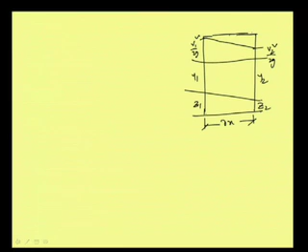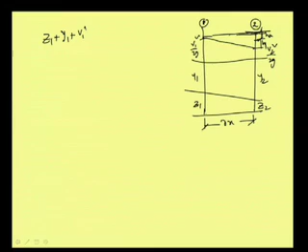And then there is energy loss that we could get some expression for. This energy loss we can divide into 2 parts, hf, loss due to friction, and loss due to acceleration. Then equating the energy between section 1 and 2, just recall we did that in our last class, we could write that z1 plus y1 plus v1 square by 2g is equal to z2 plus y2 plus v2 square by 2g plus hL. This hL is nothing but hf plus ha, friction loss plus energy loss due to producing that acceleration. This part also we derived in our previous class.

Then putting those expressions, if we recall, hf we got from the friction slope. If friction slope is Sf, then Sf into delta x is the total friction loss, hf. And the loss due to acceleration we could derive as 1 by g, del v del t into delta x. This acceleration loss is per unit weight; you can see this energy we are writing in terms of per unit weight. That is why we calculated this acceleration also in terms of per unit weight.

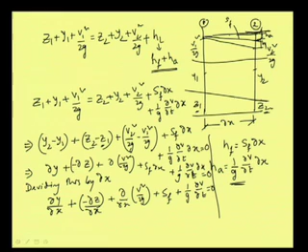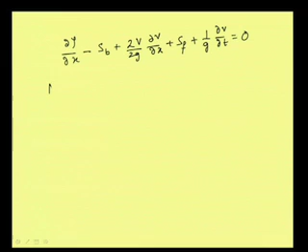Now, this we can differentiate. How? Twice v, then del v del x. So, let us do that. Twice v by twice g, and so it will be v del v del x plus Sf plus 1 by g del v del t, this is equal to 0. Okay.

Now, if we multiply this expression by g, what will we get? Say g del y del x plus Sf minus Sb, I am writing Sf first, then the 2 and 2 go out here. So, it will be v del v del x, then plus del v del t is equal to 0.

This is the equation; with Sf and Sb we did not have the term g, so as we are multiplying by g, this will be multiplied by g, and this is the equation of motion. Now we are treating this as a derivative, although we were writing a small increment earlier, following the basic concept that v will be changing partially with respect to time. That is why we were putting the notation del there to represent a small distance.

So then we can write this as del v del t plus v del v del x plus g del y del x plus Sf minus Sb equal to 0, and this is the required equation of motion. This is a simple way of deriving this equation. Of course, as I explained in the last class, we can derive this expression starting from momentum, from Newton's equation of motion, and that way also we can get the equation.

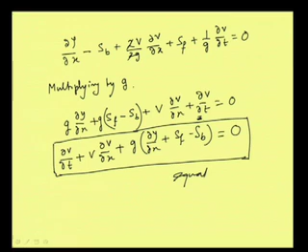Say this is our equation of motion. Now in this equation, if we consider the bed slope to be very small and negligible, then SB will become 0, so this term goes out of our equation. Then if we consider SF, the friction loss, to be negligible, suppose it is a short reach or somehow we are neglecting the friction, that will go out, and the equation will take a different shape.

As we have explained already, solution of these equations is not that simple because of their form, and if we consider the fully dynamic equation, the solution becomes complex and we need to take recourse to numerical methods. Let us see how we can solve the governing equations. The governing equations of unsteady, gradually varied shallow water waves are of nonlinear hyperbolic type.

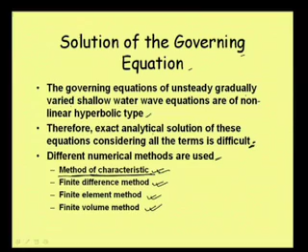Now, as far as this particular course is concerned, we will be discussing just some aspects of the method of characteristics, not all, because these we are keeping for a higher level of study. So the method of characteristics also will not be discussed in detail.

Monge in Paris developed a graphical procedure in 1789 for integration of partial differential equations. In fact, the method of characteristics was initially given as a graphical procedure for integration of partial differential equations, and he named this procedure the method of characteristics. So it came long back in mathematics. Then Massau, and Craya and Isaacson, applied this method for analyzing flood waves in open channels.

Now you may wonder how it still remains popular. It was started long back in 1789, people used it in 1889, so why is it still being used? Because starting from the method of characteristics, Ritter did a solution in 1892, long back, for dam break flood wave simulation.

Then we started this problem, and we could see that for dike failure, to simulate the dike failure flood, suppose the flood is moving from the river due to failure of a river dike, in that case we do not have a solution, or we require a solution to fit into the initial part. Later on we can take it numerically, but the initial solution is important in some aspect.

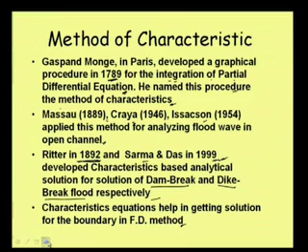And this method of characteristics helps us in getting the solution for the boundary. That's why we need to study this method and the very basic concept of the characteristic method, so that if we go to a higher level and apply other methods, we will be able to use the advantage of this knowledge of the characteristic method.

Well, then the method of characteristics, what it is, its basic way of doing is that this is a technique of converting a problem of solution of two nonlinear hyperbolic partial differential equations into a problem of solution of four ordinary differential equations. As far as our water problem is concerned, we have two nonlinear partial differential equations: one is the continuity equation, another is the momentum equation or energy equation.

These two partial differential equations, nonlinear hyperbolic type, cannot have a direct solution by direct integration. So if we can convert these two equations into ordinary differential equations, then our task is simplified. That is done by the characteristic method, and then we can plot those graphically, and this gives us the solution at certain points. We will be coming to those points.

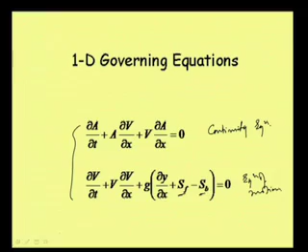So let us take this equation, and we are writing this for a prismatic rectangular channel. If we write it for a prismatic rectangular channel, then this will be further simplified. So we will be starting with this expression: del A del t plus V del A del x plus A del V del x is equal to 0.

So this is the continuity equation first, and we can write del (B into Y) del t plus V del (B into Y) del x plus, this area again we can write B into Y, then del V del x, that is equal to 0. Now this part we are writing for rectangular, and then for a prismatic channel, what is that?

For a prismatic channel, B is not varying with x, meaning our width is not varying with distance, because the very basic definition of a prismatic channel is that the sectional dimension does not change in the channel reach considered. So this B is not varying, and as such we can bring B common, or rather we can cancel B.

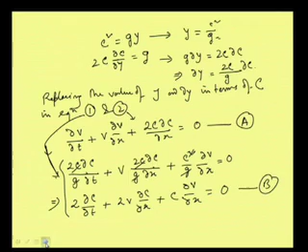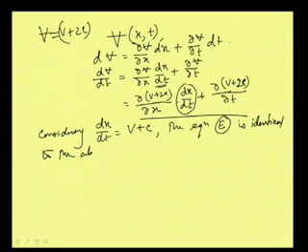Considering dx/dt equal to v plus c, that means if we put dx/dt equal to v plus c, then the equation, let me give a name to this equation, say E. The equation E is identical to the above equation. So what we are getting basically is the total derivative of v plus twice c with respect to time t. So it is identical.

So if it is so, our expression is actually equal to 0. This expression is equal to 0, so this is also equal to 0. That means d(v plus twice c)/dt is equal to 0, but this will be valid when dx/dt is equal to v plus c.

So the total derivative of v plus twice c is equal to 0, which implies v plus twice c is constant. Along with that we have to have the equation dx/dt equal to v plus c. So these are the combined equations. Only on those points where dx/dt is equal to v plus c do we get that v plus twice c is equal to constant.

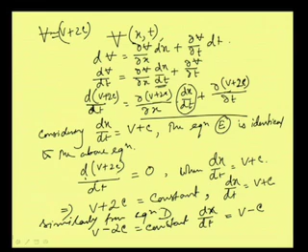Similarly, if we take the other equation, equation d, obtained by subtracting, we can get v minus twice c is equal to constant when dx/dt is equal to v minus c. So these are basically ordinary differential equations. We started with a partial differential equation, but we are getting ordinary differential equations, four equations in this form. This gives us a better opportunity for solution of the problem.

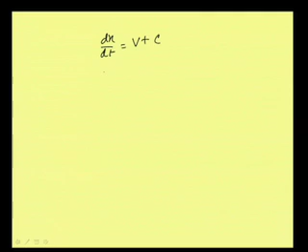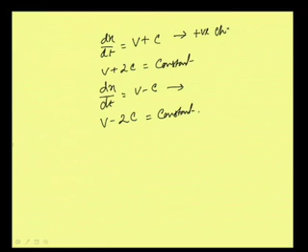Now, these can be written as dx/dt equal to v plus c, along with v plus twice c equal to constant, and dx/dt equal to v minus c, with v minus twice c equal to constant. These are called characteristic equations. Since this one is v plus c, it is called the positive characteristic equation, and this one is called the negative characteristic equation.

And v plus twice c equal to constant is called the positive Riemann invariant, and this is called the negative Riemann invariant, because it is not varying, it is remaining constant.

Now let us understand this point: we can consider v plus twice c as constant only on those points which follow dx/dt equal to v plus c. If we make a computational domain of x and t, we can have a line whose slope is given by v plus c.

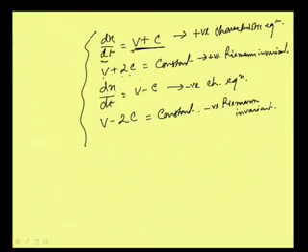So v plus c gives us the slope, and accordingly we can draw a line. At any point on that line, if we take v plus twice c at one point, and v1 plus twice c1 at another point, the value will remain constant. Taking that advantage, the characteristic equations can be used for solution of the governing equation.

Now let us see how we represent this graphically. Graphical representation means we take the x-t plane, so this is our x and this is the time t.

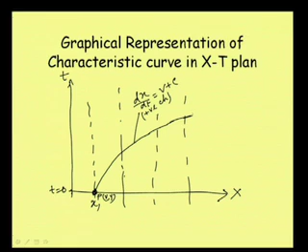Now initially, at the steady flow condition, suppose we know the value of the variable at some value x1. What are our unknown values? Our unknowns are the depth and velocity. So at this point, let this point be p, suppose we know v and y, and we know that v plus c is equal to dx/dt. So accordingly we are drawing this line.

Then say at another time level, t1, we do not know, because unsteadiness has started and we want to get the solution at time t1. At this time level we have this point, let me write it as r because I will be drawing another curve on that side. At this point the velocity and depth are unknown at time level t1.

But we know one relation, if I put this as v_r and y_r. Along this line we know that v plus twice c is equal to constant. So v_p plus twice c_p, where c is nothing but root over g y_p, is equal to v_r plus twice c_r. Let me write it as c_p and c_r so that you may not confuse.

But what is c_p? So v_p plus twice root over g y_p is equal to v_r plus twice root over g y_r; our unknown quantity is actually y. So these equations are there, but we need to solve for two unknown quantities, v_r and y_r, and we have only one equation.

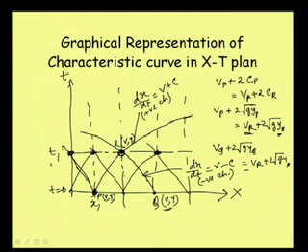That is the beauty of the characteristic method. Once we know this value, similarly we can get the solution here, and proceed to solve here and here. But to solve this one we need some boundary condition or boundary relation. Of course, we will be getting one negative characteristic line giving one relation, but we need one more relation.

Okay. Now, let us see for subcritical flow. For subcritical flow, we know that V is less than C. Then dx/dt equal to V plus C, the positive characteristic line, will have a positive slope. And dx/dt, say, what is the negative characteristic line?

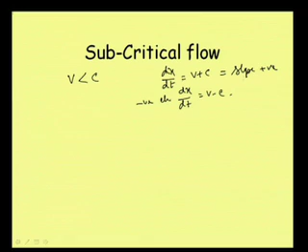Negative characteristic: dx/dt equal to V minus C. As V is less than C, this will have a negative slope, and that is why when I was drawing for subcritical flow, if I draw the x-t plane, this is the time, this is x, then for subcritical flow we get the positive characteristic line this, negative characteristic line this. This is the positive characteristic and this is the negative characteristic, and that is why earlier we were drawing this is positive, this is negative.

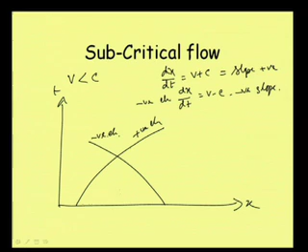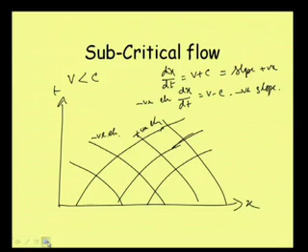Well, this is not the only line; we will have several sets of lines like this and several sets of negative characteristic lines, because at different points we will have different situations, and that will lead us to several lines. Then in the case of supercritical flow, V is greater than C. So the positive characteristic, dx/dt equal to V plus C, will definitely be positive, but the negative characteristic, dx/dt equal to V minus C, will also have positive slope.

So positive means we are talking about positive slope in the x-t plane. We are drawing this in the x-t plane, and because V is greater than C, V minus C will also have positive slope. But which slope will be greater? Because of V plus C, the positive characteristic line slope will be greater, so it will go like this. Greater means we are writing dx/dt, not dt/dx. So t is this, x is this. Slope more means it will be from the t line.

So the positive characteristic goes like this, and the negative characteristic goes like this; it has less slope. From our general concept we may feel this has higher slope, but we are talking about slope with respect to this line. So this has less slope; it is the negative characteristic. That way we get a series of curves like that. And this is the case when the flow velocity and wave are moving in the same direction.

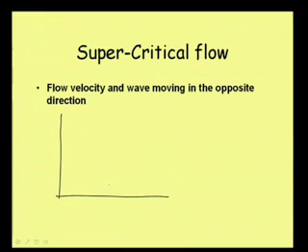If the flow velocity and waves are moving in opposite directions, then V becomes negative, and both curves have negative slope. The positive characteristic also gets negative slope, because V is negative this time. So V minus C means minus V minus C, that will be steeper and the other one will be flatter. Like that we get positive and negative characteristic curves both sloping upstream, and this becomes more important when we go for numerical solution.

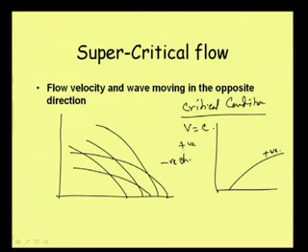Now, to complete this, what happens for critical condition? At critical condition V is equal to C. So the positive characteristic line will have a positive slope. But what about the negative characteristic line? It is V minus C, and as V and C are equal, dx/dt becomes 0. dx/dt equal to 0, with respect to the t and x axes, means this line will be just vertical. So this is the negative characteristic line for critical condition.

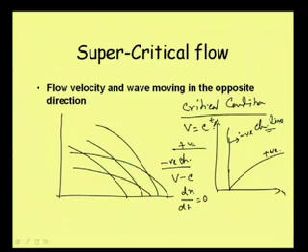Well, with this limited time we have tried to give you some idea of the characteristic method and how it can be helpful in solving some problems, and that way we could cover at least the very preliminary part. There are a lot of things to be discussed in this line, and how these are applied for actual solution also needs discussion, which we are keeping for a higher level of study.

And for unsteady flow in our discourse, let us conclude here. Till today we have been doing open channel flow; from next class onward we will be moving to a different topic, pipe flow.